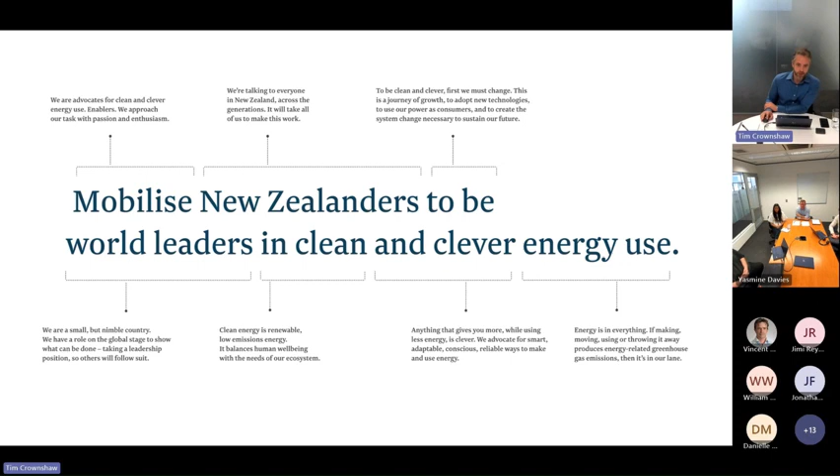This is our overriding objective here. EECA's purpose is to mobilise New Zealanders to be world leaders in clean and clever energy use. So this is definitely driving this work, and something we would like the results of the study to affect. So to drill down into a little more detail...

Part of EECA's role is to provide advice to residential consumers about their energy use and carbon footprints, in line with strategic objectives of energy efficiency first, and empowering energy users. So the purpose of the study is to explore how life cycle carbon emissions vary across different residential space and water heating technologies, drilling down into the specifics of the use case. We're primarily considering resistance heating versus heat pumps here.

Both electrified options, and we are wanting to explore this across various contexts representing New Zealand's residential diversity of housing and energy use patterns. A goal sitting below this is we would like to use residential space and water heating as a case study to investigate these underlying relationships between cost, efficiency, life cycle carbon, and cumulative energy demand.

So this project is intended to be in support of various EECA programs. Warmer Kiwi Homes is an obvious one, where we are interested in this trade-off between active and passive space heating options. It will also likely inform the E3 equipment energy efficiency program and minimum energy performance standards associated with this.

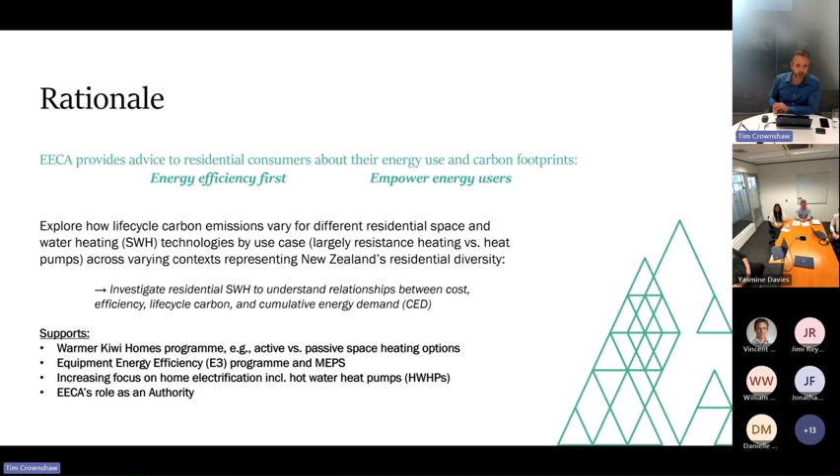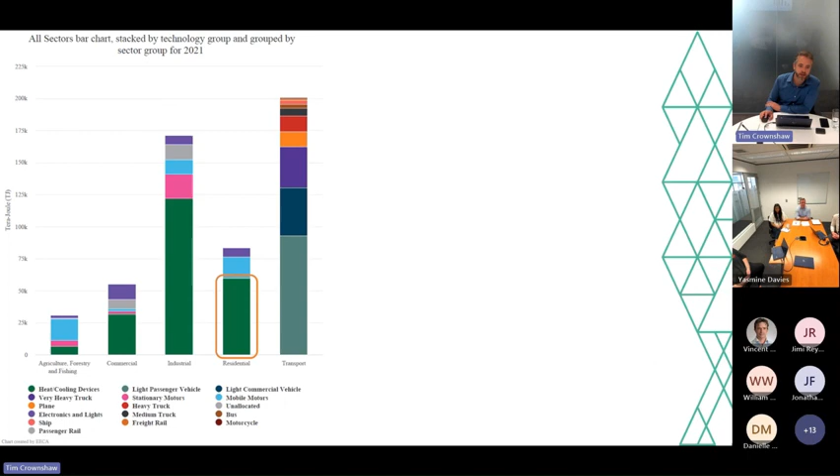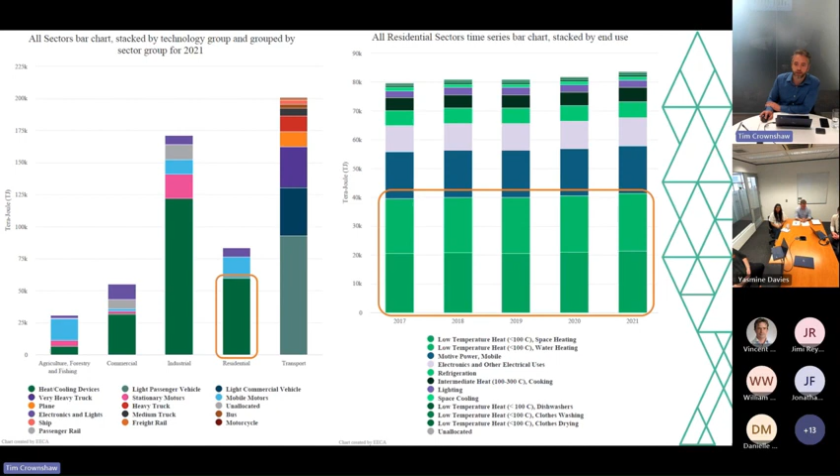It's approximately 50% of total home energy consumption, so it's reasonably significant in that sense, although within the bigger picture, each of these segments is only approximately 4% of total final energy consumption. But it is one of the areas where we see a potential for behavioural interventions and shifting use patterns.

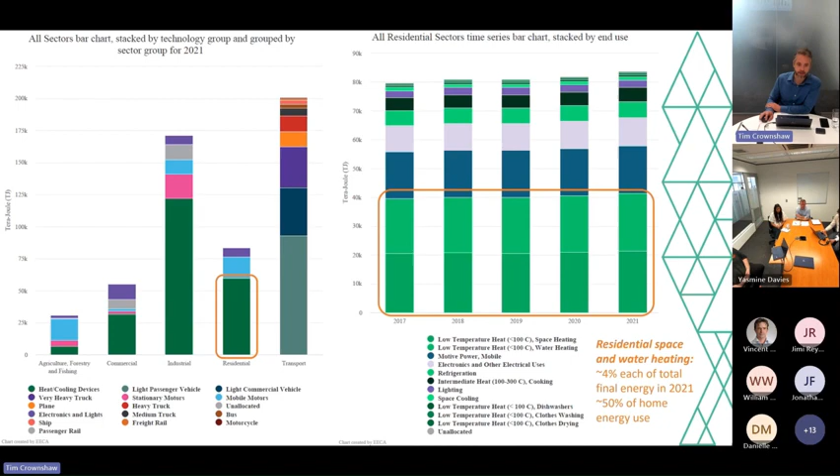So a little bit more about the space and water heating options. The default position that EECA is taking is that heat pumps are typically the more efficient, typically the best option. However, we are looking to introduce some nuance into this discussion, and primarily that's around the wide diversity of both the use cases and household types, and also the various installations, the various technologies and how they can be installed in the home. There are a number of other issues that are relevant here.

So refrigerants is one that we're interested in, and the global warming potential associated with refrigerant losses. Also key to this particular research project, the question of embodied emissions in those technologies and the capital costs. Also variability in the operational lifetimes of the various equipment, maintenance requirements that they might have, and also implications for peak demand and controllability of those assets.

And this is all against the backdrop of a rising renewable share in the supply mix and widespread anticipated electrification of homes and businesses. So it's within a relatively dynamic moving picture of the New Zealand energy system.

I should note here that we're also interested in technologies that can supply both space and water heating. These energy service categories are often considered separately, but there are systems such as underfloor hydronic that can address both, potentially with greater efficiencies. So this drives a research question for this project of what available space and water heating technologies should households select to minimize the lifetime carbon emissions?

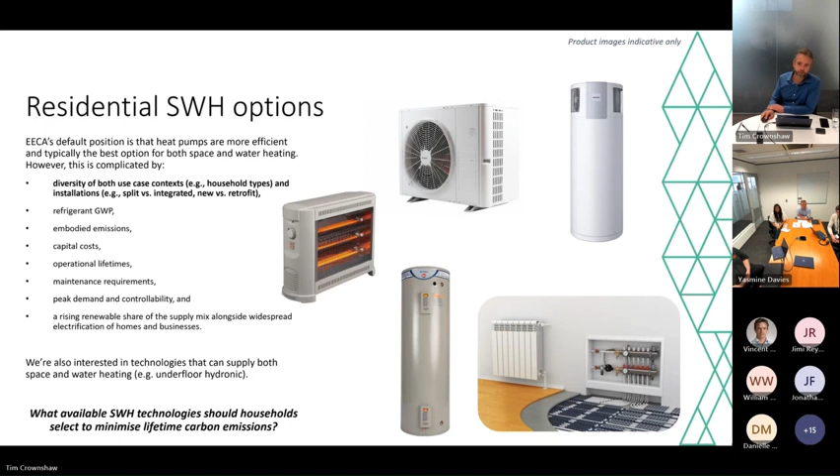So a little bit about the pre-tender engagement. We conducted this with a cross-section of suppliers in the market in late 2023 and early this year. And this was undertaken at a relatively early stage while the study was still being conceived. So this engagement, the primary reason for this was to refine the project scope and to develop our own thinking in the space. And the requirements in the published RFP are EECA's own requirements.

Okay, moving on. So the RFP itself. What we're seeking, what we require is essentially lifecycle analysis, and in particular in compliance with ISO 14067, focusing on energy and carbon emissions in particular. And we're wanting to calculate cradle to grave emissions and cumulative energy demand associated with the annual supply of space and water heating. So to do this, there are several components here that will need to be addressed.

One is a material inventory, or a set of inventories describing typical space and water heating installations in New Zealand. And we're interested here in space and water heating energy service categories separately, and also the potential for a combined category there. And we do want to consider the ancillary hardware that would be required for demand response that's expected in the coming years, specifically AS/NZS 4755 compliant.

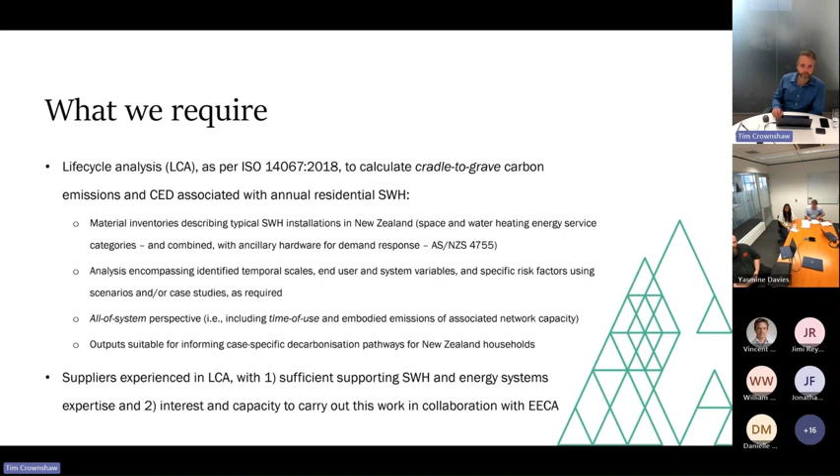So some of the key inputs and variables. Mainly to describe the use case, we're looking at a series of variables: dwelling type, insulation level, heating schedule, occupancy, and climate zone. We're looking at likely four climate zones in this study, but that's yet to be determined.

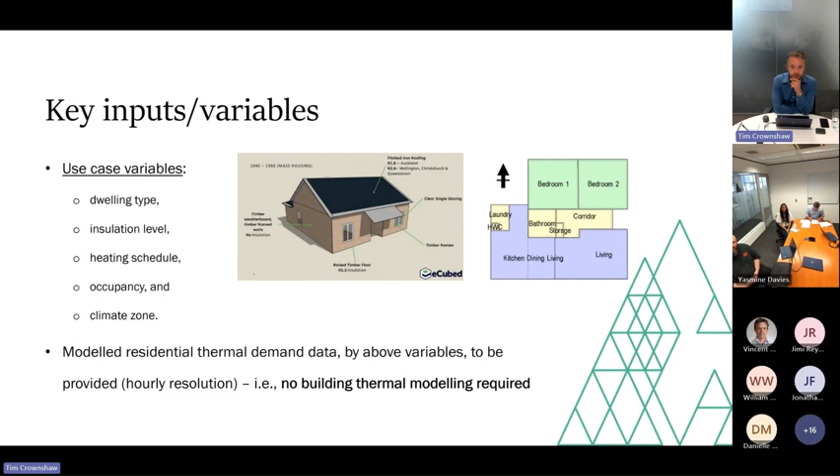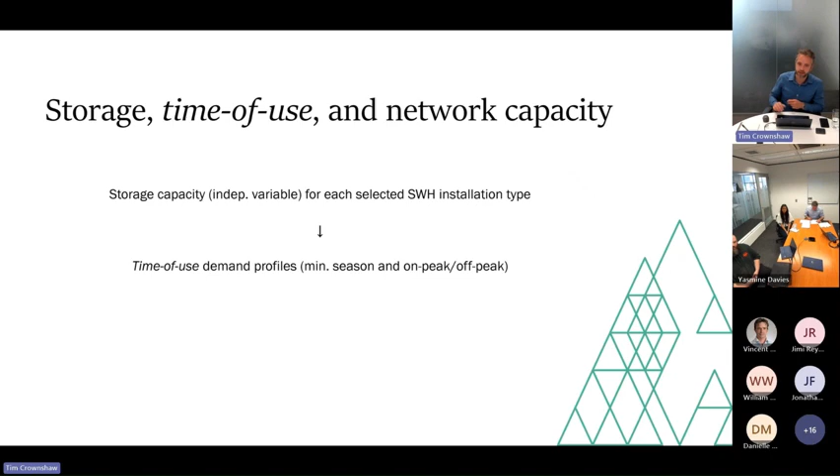So this connection between storage and network capacity is one aspect of the study that we think is quite interesting and we've chosen to focus on. For this reason, we would like to treat storage capacity associated with any given space and hot water heating installation as an independent variable where that makes sense, and vary this in order to look at changes in the time-of-use profile. At a minimum, we'd want to consider the difference between seasons and also on-peak versus off-peak demand.

In conjunction with this, this will require a forecast of both network and generation build. From this, we will calculate not only the direct emissions, the typical B6 component of an LCA, the operational energy use and associated emissions, but also this broader boundary: embodied emissions from incremental changes in transmission and distribution capacity. Essentially an analysis of peak demand here and the embodied emissions that can be attributed to a given household user.

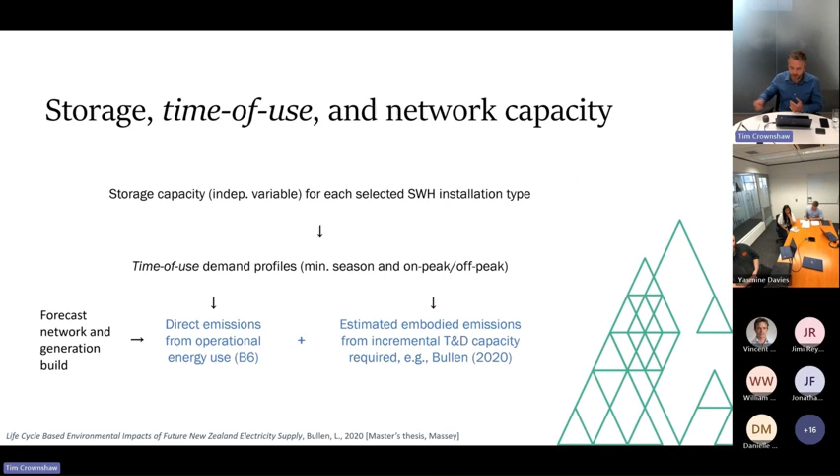We understand that it won't be possible to carry out an exhaustive LCA or a detailed study for this second component, so we will require some form of simplified estimation method. There are examples out there in the literature — there's a master's thesis listed at the bottom of the page here, but this is certainly not the only one. We are open to varying levels of detail in this estimation, as long as the associated uncertainties are propagated through to sensitivity analysis, which I'll discuss soon.

Alongside this work, there are various other pieces to flesh out to complete the project. First would be, following the calculation of life cycle emissions of the various technologies, the identification of optimal combinations of those technologies for each combination of end-use parameters. So for each end-use case type, essentially each household type, which combination of technologies minimizes life cycle emissions.

We're also interested in equipment lifetime. We would want to investigate to some extent whether this is better modeled as a function of utilization or perhaps simply elapsed time, and also consider particular environments which may affect this, such as coastal regions, flagging those where necessary.

Finally, sensitivity analysis of the key outputs, primarily life cycle carbon, to uncertainties we can identify—generally associated with quality and completeness of some of the available data, how suitable that data is in the New Zealand context, for example any adjustments made. Also variability in refrigerant losses, variability in equipment lifetimes relating to the above point, and finally, given the uncertainty involved, a plausible range of future emissions intensities for electricity supply and also associated network build in New Zealand over the relevant time frame for the equipment we're looking into.

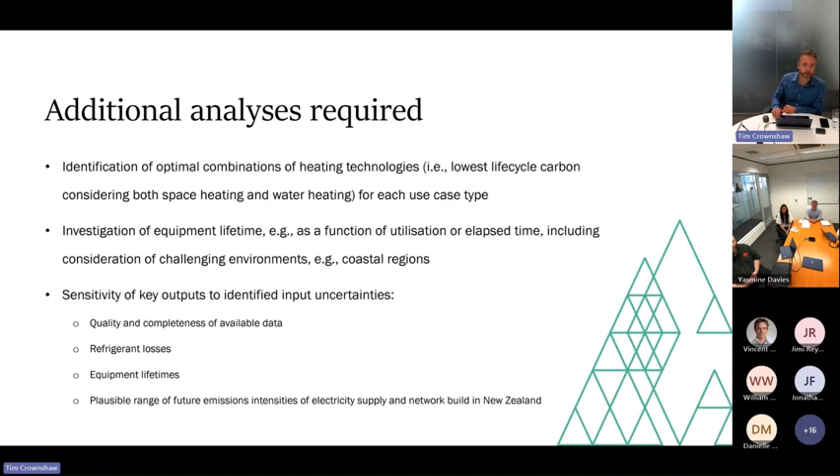Okay, so finally, here are the evaluation criteria that we have. We're focusing on the quality of the proposed solution, whether it's fit for purpose, transparency around key uncertainties and risks and mitigation of those risks, and the suitability of the proposed deliverables.

Secondly, capability, so experience of personnel and any demonstration of the technical and market knowledge you may have, in particular in these three areas: life cycle analysis, building services, and residential space and hot water technologies. And finally, broader energy systems analysis.

Capacity: we'd like to see previous or current examples of similar work, a breakdown of the work proposed, an overview or structure of your organization, and the feasibility of the timeline. The proposed timeline is something we will look at, including mitigation of any issues regarding it, and also your proposed work arrangements for collaboratively working with us.

Then on broader outcomes, we're looking at government broader outcomes, for example engaging with Māori and Pasifika businesses, and reducing emissions. Finally, public value, or the competitiveness of your estimated total cost.

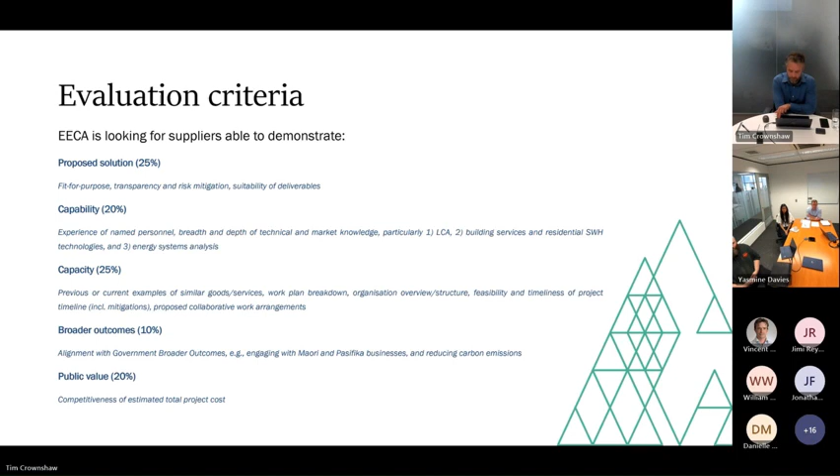Okay, that's it. So we're now at the point for questions. I think we can open the floor.

Brad, did we want to start with anything in the Q&A? I don't see anything there currently.

So we have a question here: is there a page limit for proposals, unless otherwise addressed in the procurement plan, in the RFP? No, there is not. We do hope that it's just proportionate to your solution and provides the information needed for us to conduct an evaluation.